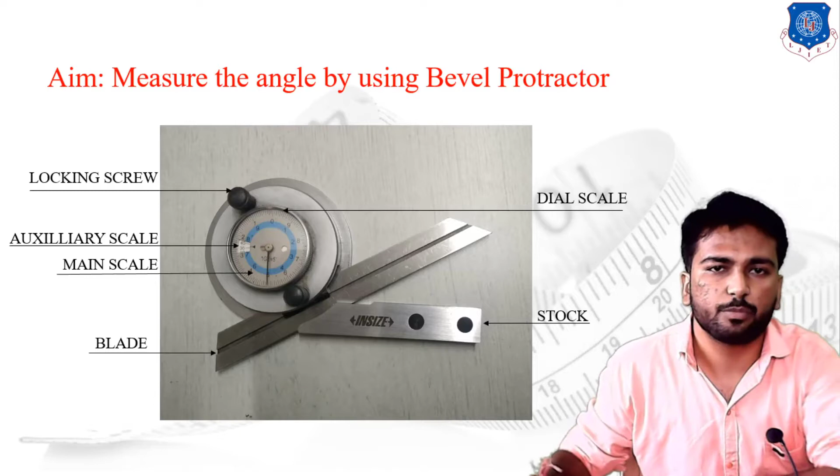Today we are going to start our practical with the aim to measure the angle using the bevel protractor. A bevel protractor is a kind of instrument used to measure angles. This particular image shows the actual photograph of the bevel protractor.

Before starting the measurement of the angle of a given workpiece, or any kind of taper workpiece, using the bevel protractor, let us first understand the constructional details of the bevel protractor, and then we will move on to the measurement of the angle.

In the bevel protractor, we have a scale. This is the main scale, and we have the auxiliary scale over here. As you can see from the image, we have the main scale as well as the auxiliary scale. We have two types of scale.

On the main scale side, we have the scale in white and blue color. Both scales start from 0 to 180 degrees as per the rotation of the blade. This is a blade made up of steel material. We have the locking screw which is used to lock the scale for measurement purposes.

Then the dial has been provided over here. The dial is used to check the reading for the auxiliary scale, and this is known as the stock. This component, the stock, is for holding the workpiece properly and at a very perfect angle.

To measure the angle, we have to insert our component over here. Once the component has been inserted, as the blade moves in one particular direction, the scale will open and we can find the reading.

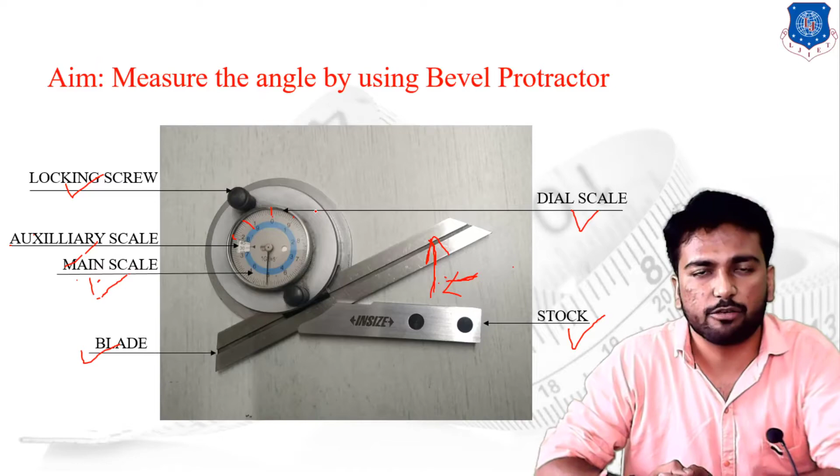The bevel protractor measures angles in terms of degrees, but the auxiliary scale is in terms of minutes. So at the time of reading, we have a combination of degree and minute, and we have to convert the minute into degree. We know that 60 minutes equals 1 degree, so using this conversion we can convert our reading.

So let's start the practical. As we have discussed, this is the bevel protractor. This portion is known as the stock. This is the steel blade, and the dial with a pointer has been provided over here. Each division on the dial shows 5 minutes.

As you can check from the dial, we have the total numbering 0, 1, 2, 3 and so on provided. Each number has a total of 12 further divisions.

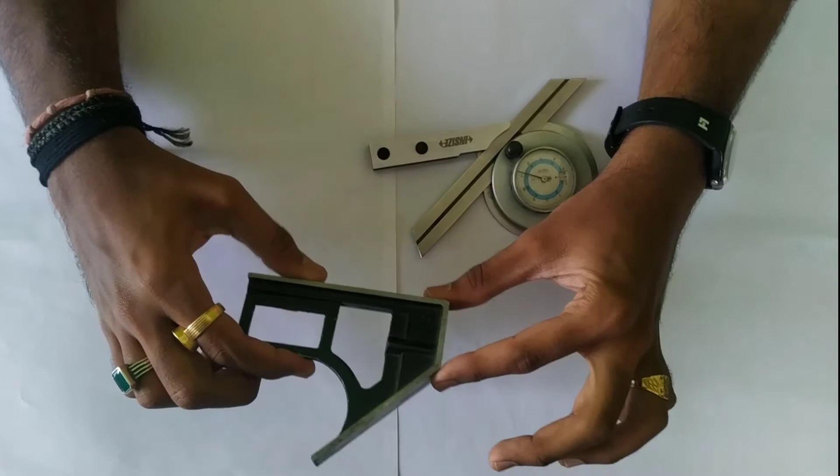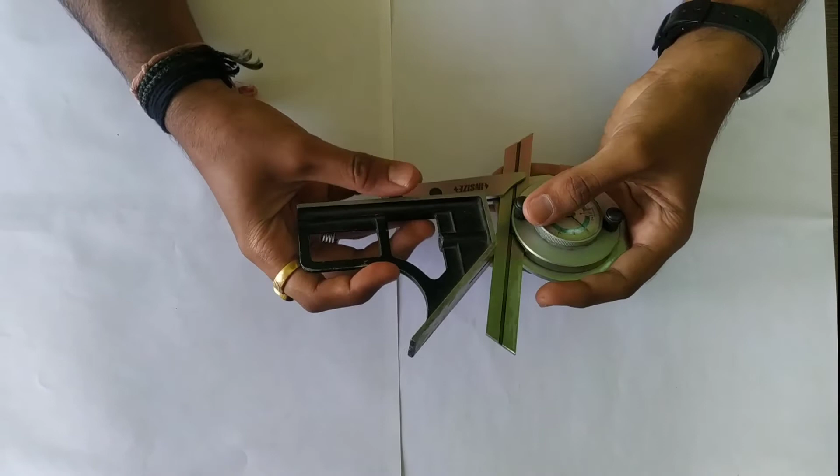Let us start to take the workpiece. If we have to measure the angle of this workpiece using the bevel protractor, what we have to do is extend the blade of the bevel protractor, then place the workpiece like this and make proper contact between the blade and the workpiece.

Adjust your workpiece properly. Check that the particular bottom surface has been properly placed with the stock, and the top surface has been properly placed with the blade.

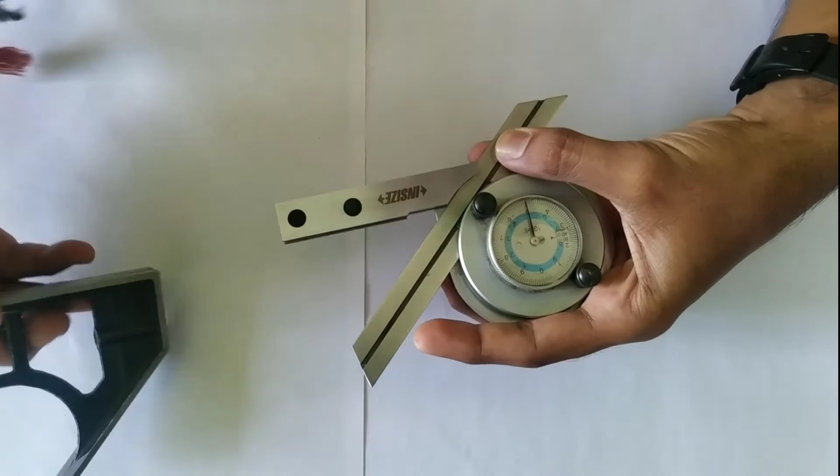Now remove your workpiece and lock your scale. Now the scale has been locked. Put your bevel protractor firmly over the surface, then start taking the reading.

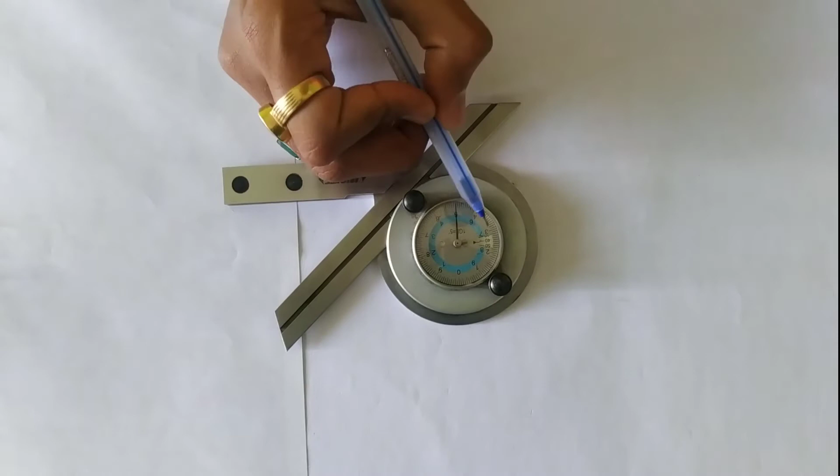Now how to take the reading? In the dial caliper we have a small box with a small pointer provided over here. Check the position of this pointer. From the small box, you can check that the pointer has been placed in between 40 and 50. So we can say that the minimum angle of the given component is 40 degrees. This 40 degree is known as the main scale reading.

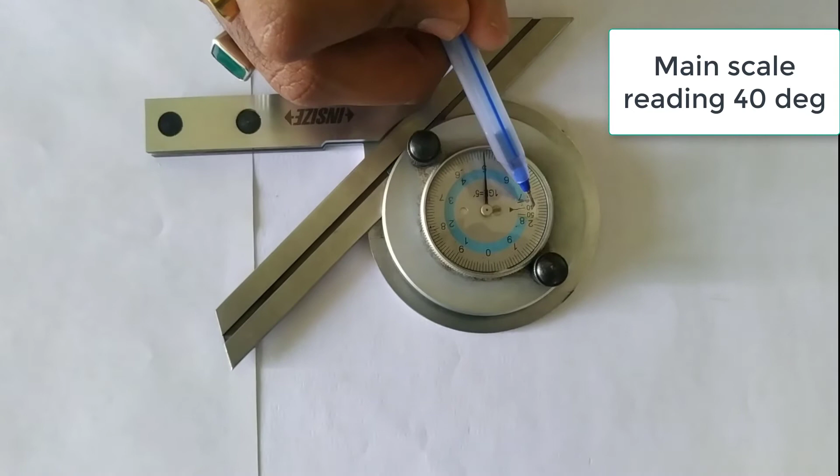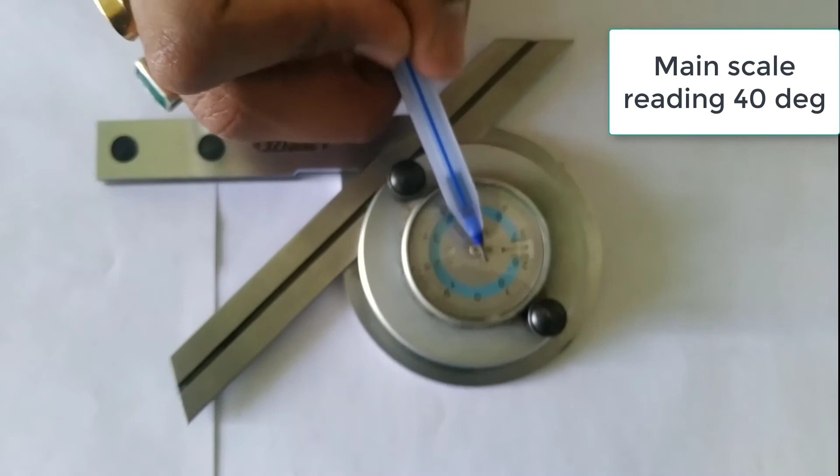Now we have to measure the auxiliary scale reading. The box shows the white scale, so we have to measure the dial over the white scale. The extreme scale is known as the white scale. To measure the pointer position, the pointer is placed over the 5 number division.

As I have told you, from 0 to 1 we have a total of 12 divisions. From 1 to 2 we have 12 divisions. Same way from 2 to 3, 3 to 4, and 4 to 5 we have 12 divisions each. So if we move from 0 to 5, we have covered a total of 60 divisions, and each division covers 5 minutes. So our auxiliary scale reading is 60 divisions into 5 minutes, which gives us 300 minutes.

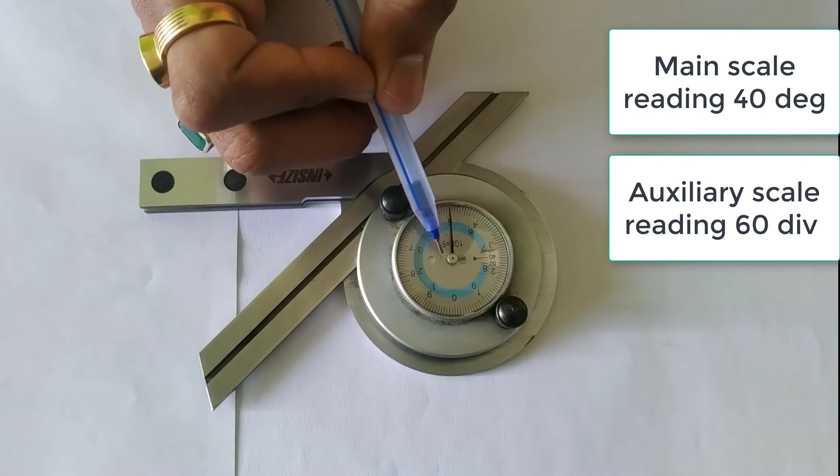Now we are moving to the reading portion. We have taken the reading, now let us go for the calculation. Before that, let us understand what least count is. The least count is the smallest value that can be measured by a measuring instrument. For this particular bevel protractor, the least count is 5 minutes.

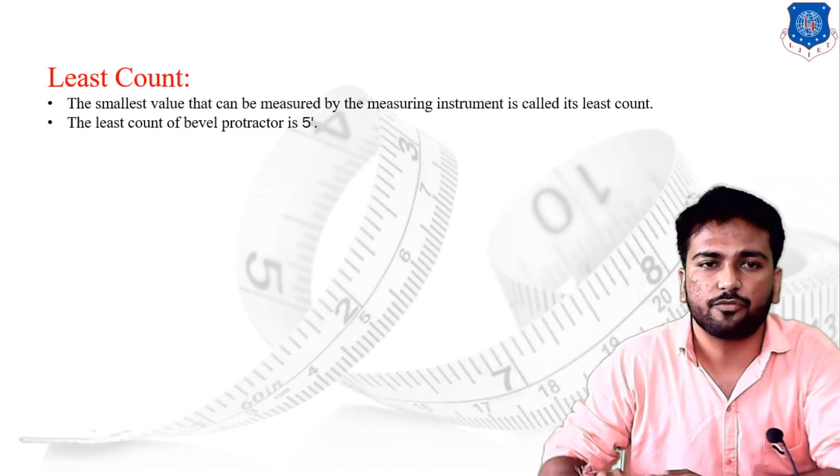As I told you in the theory section, the least count, or the minimum dimension that can be measured, is one division, and one division represents 5 minutes. So the least count for the bevel protractor is 5 minutes. Now let us go for the calculation.